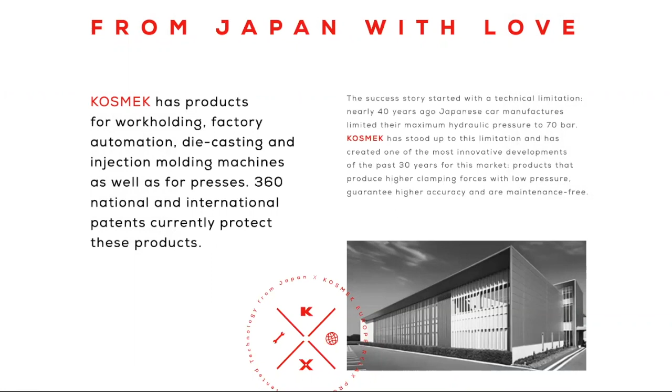KOSMEK is the world's leading expert in powered clamping. Due to the limitation from Japanese car manufacturers to 70 bar maximum pressure 40 years ago, KOSMEK developed one of the most innovative technologies for pneumatic and hydraulic work holding solutions like clamping, positioning, and supporting, and also for the factory automation range. Since then, KOSMEK has been the continuous market leader in Asia. 8 years ago, the increasing demand for KOSMEK's patented low-pressure technology brought the company to Europe.

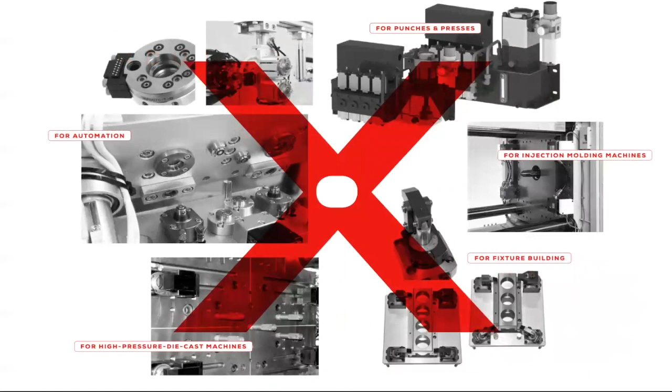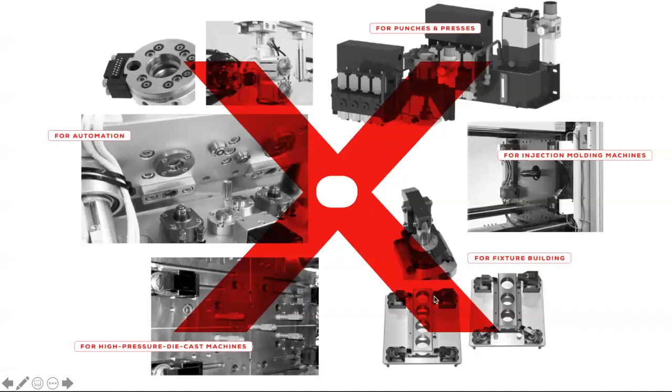KOSMEK is the only company in the world covering all areas of a workpiece production process. We offer solutions for casting, injection molding, and punches and presses. For example, quick mold change systems, ejector rods for changing ejector patterns, positioning of the mold, and pre-rollers for easier loading and unloading of the die. In terms of work holding machining, we have various hydraulic and pneumatic clamps, work supports, and other positioning solutions. In terms of factory automation, we have tool changers, pallet changers, and even grippers.

Have you ever thought about your machining center being able to autonomously machine without any operator present? What would that mean when a robot automatically changes workpieces on your machine depending on what you are making? Or when a robot is able to flexibly insert raw parts into the machine and unload the manufactured parts? Or when a robot handles different devices, workpieces, and low lot sizes while your employees are not in the company or not available?

I would like to bring these answers to these questions in this webinar, because KOSMEK is able to bring these processes onto the robot itself. KOSMEK is able, because of the zero backlash technology, to guarantee a repeatability of 3 microns, as well as reduce the hydraulic usage for the upcoming process steps. Let me show you in the following slides how you are able to achieve this at your machining centers as well.

Here you can see an automated pallet changing system from our distributor Hofmeister. Hofmeister is specialized in CNC design and production of special tools, fixture building, design of production lines, and also has a high-end CNC machining floor, including 5-axis machine tools. For many customers, they machine various parts in different lot sizes on a regular and irregular basis. In order to automate these production orders, they decided to invest in a 5-axis machine tool from Okuma.

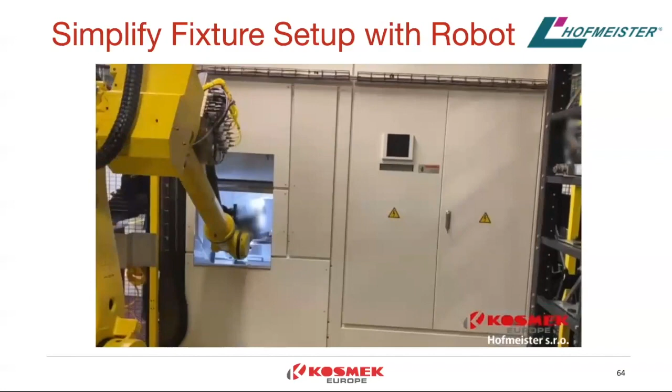Equipped with a KOSMEK 0-point system and the Fanuc robot for 120 kilos, and also equipped with a KOSMEK SWR tool changer and WVA pallet gripper. With the KOSMEK WVA pallet gripper, the robot can automatically load and unload pallets up to a weight of 100 kilograms to the machine table, and place or remove it from storage.

On the table, the pallet will be fixed and positioned with the KOSMEK VS 0-point clamp system. With the patented dynamic positioning technology and high clamping forces of up to 40 kilonewtons, the 0-point system guarantees a repeatability of 3 microns even after millions of loads.

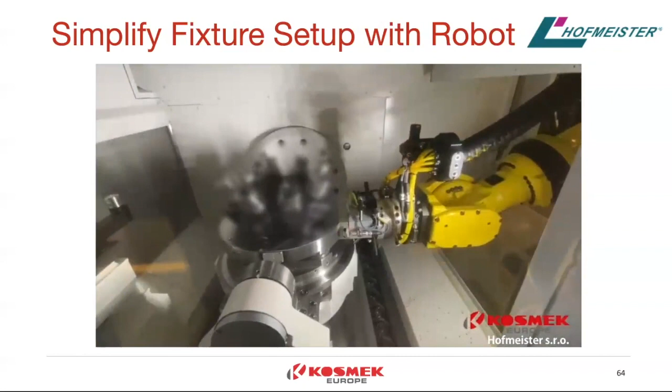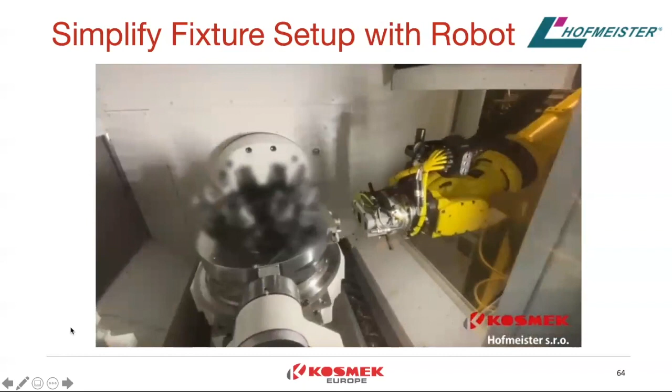Depending on the size and weight of the tool, it can be changed to a different size of pallet gripper or each other tool of the robot. This can be done through the KOSMEK SWR tool changer. This robotic hand changer is the only hand changer which is completely backlash-free in the whole world. It is even stronger, but at the same time smaller than other products on the market.

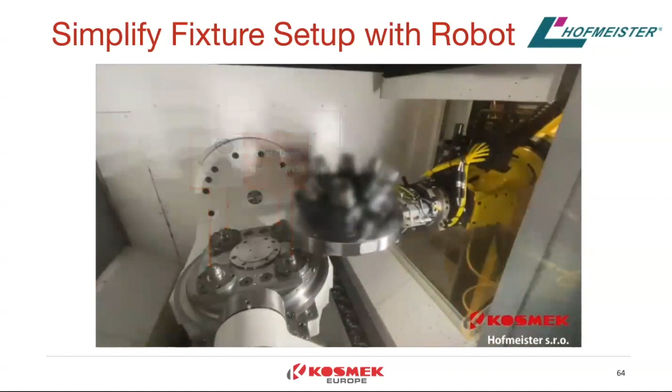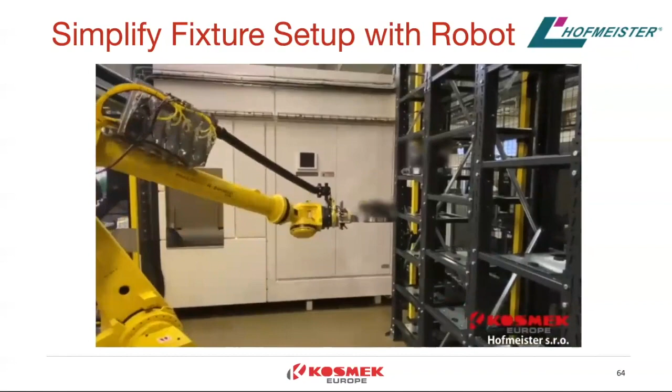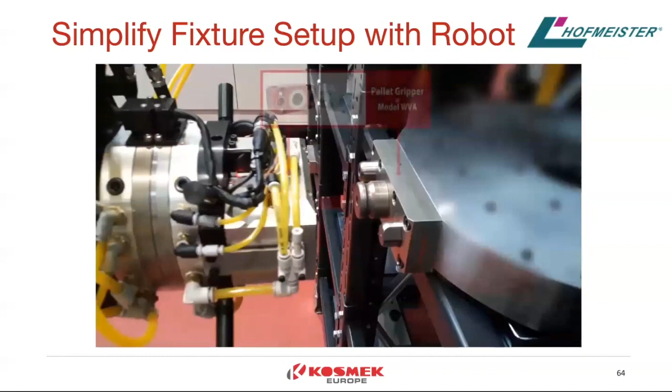All of these unique technologies combined into a highly effective automated manufacturing cell allow the company Hofmeister to automate the production of many different smaller lot sizes, drastically reduce setup times, increase overall product quality and precision, and let production continue autonomously during the night or weekend times.

Now let us get some information about the used products for this setup in the next slide.

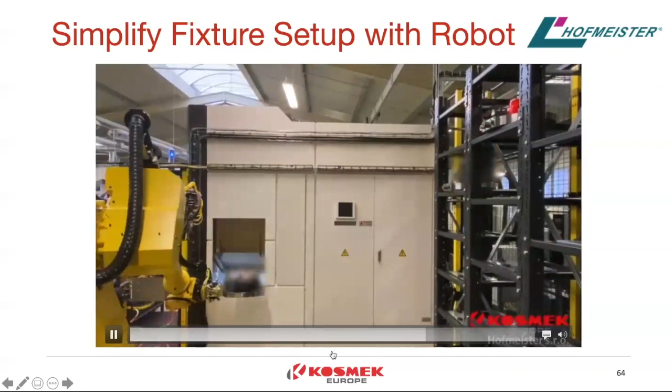Have a look at the WVA pallet gripper in detail. The KOSMEK WVA pallet gripper is designed especially for gripping, transferring, and placing heavy fixture pallets in a machining center by a robot. In this case, the pallet has a weight of about 100 kilograms.

With our pallet gripper, we can reach holding forces of up to 33 kilonewtons or 3.5 tons. It has a safety lock function so that even at 0 bar you have a holding force of another 1.9 kilonewtons. The pallet gripper can take over up to 1,322 Newton meters in bending moments and up to 1,800 Newton meters in twisting moments. The WVA pallet gripper furthermore has an integrated seating detection as well as the possibility of an action confirmation by adding a sensor.

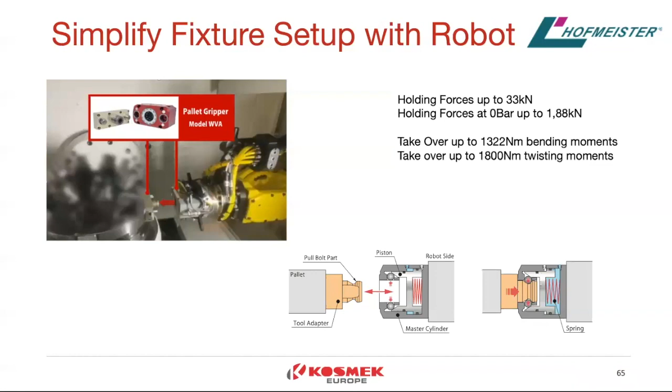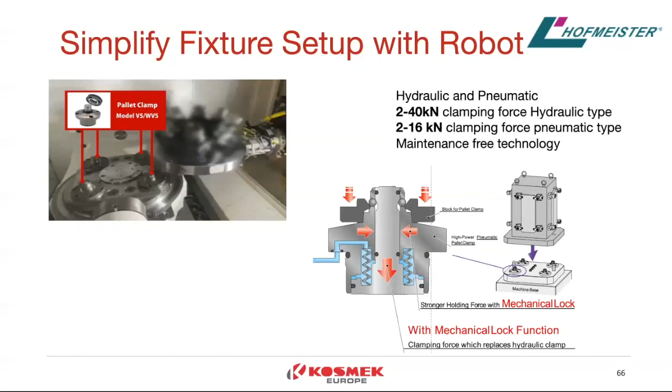Once the pallet is brought to the machining table with the WVA pallet gripper, we need to clamp and position the pallet on the machine table. To do this with a repeatability of 3 micron and at the same time a clamping force of up to 40 kilonewtons, which depends on the model, you can use the KOSMEK 0-point pallet clamp system, VS for hydraulic or WVS for pneumatic. The clamping forces vary from 2 kilonewtons up to 40 kilonewtons in the hydraulic type and from 2 to 16 kilonewtons for the pneumatic type. Also here we have a holding force at 0 bar, which goes from 0.8 kilonewtons up to 2.2 kilonewtons. The 0-point systems are totally maintenance-free and guarantee repeatability for more than 1 million loads in total.

Now the pallet is transferred to the machining center with the pallet gripper WVA and highly precisely positioned and clamped to the machine table. Now your robot can start to load the raw workpieces to the fixture for machining. To do that, you now need to change the tool.

This you can easily do with the KOSMEK SWR robotic hand changer. This unique robotic hand changer is the only hand changer in the world with 0 backlash. It takes over higher bending and twisting moments than any other product on the market. It is smaller and stronger than standard tool changers. Its repeatability is also at 3 micron and it has a range of payload from 0.5 kilograms up to 360 kilograms at 10 bar pneumatic pressure.

For automated production, it offers seating detection for a proper connection, holding force at 0 bar as a safety function, airflow for keeping the robotic hand changer clean, and various modules for electrical and pneumatic connections to the robot. For more details, please see our webinar about KOSMEK SWR and SXR tool changers, which will be uploaded in the following week.

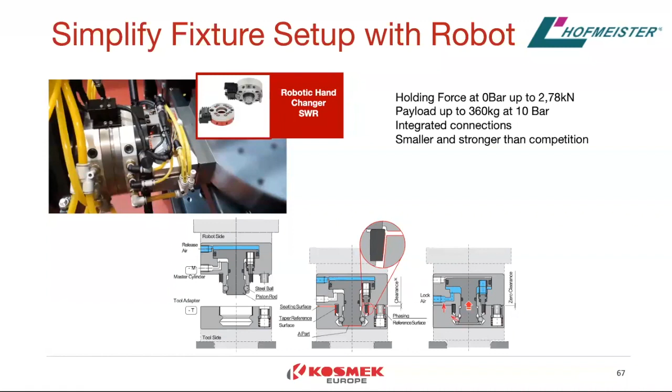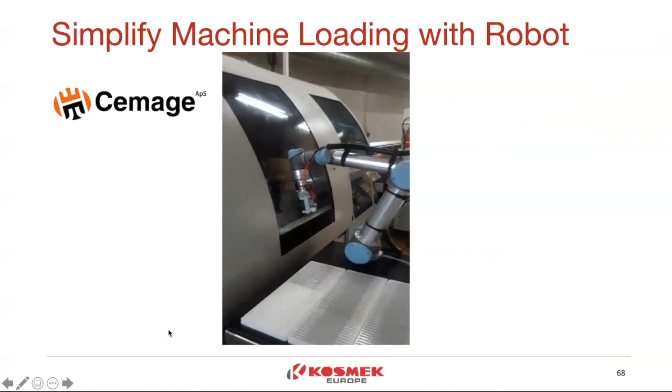Now, coming to the company Jägerspris Finmechanics in Denmark. Their task was to minimize setup times and make production much more effective by using robots in the production line.

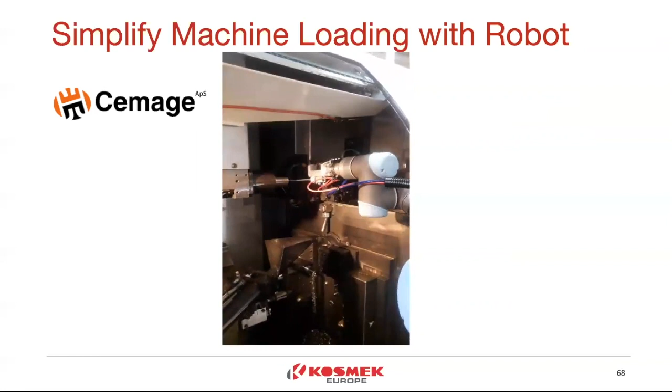The company introduced their mobile robotic unit Cemage for automated loading and unloading of workpieces in a lab. The Cemage mobile robotic unit not only can load and unload workpieces in one lab, but due to a special interface between the lab and the mobile unit, it can be moved from one lab to another, increasing the flexibility of this robot unit.

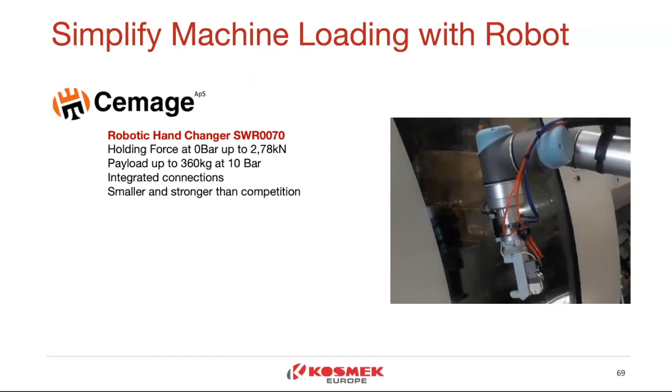The mobile unit is equipped with components as follows. The mobile unit is equipped with the KOSMEK component Robotic Hand Changer SWR. It is for an easy, fast, and secure change of the grippers and tools for the robot, depending on which workpiece shall be handled. Then on a tool changer there can be mounted various grippers and other tools.

In this setup, the customer uses the unique parallel gripper WPS-C with high power technology and holding force at 0 bar. The WPS-C can achieve up to 131 newtons in clamping force and up to 400 newtons in holding force at just 5 bar. Holding forces at 0 bar as a safety function range from 26 newtons for the smallest up to 53 newtons for the biggest model. The repeatability of 0.01 millimeters is also given for transporting the workpiece out of the machine.

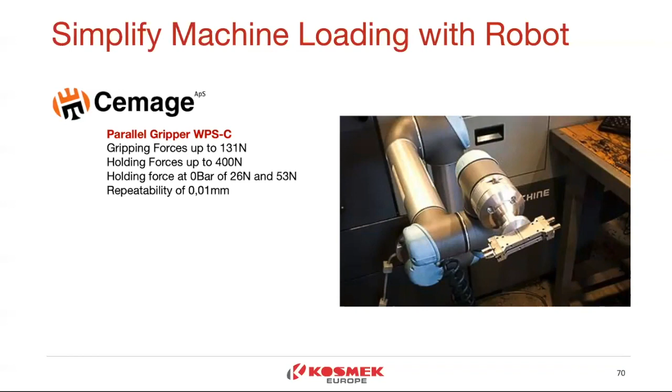The specialty of connecting the Cemage mobile robot unit to the lab housing is the KOSMEK ball lock cylinder WKA. With this very small but effective pneumatic ball lock cylinder, you can easily fix and position the mobile robot unit to the machining center housing. When moving to another machining center, you unconnect from the first center and connect it to the next.

Now coming to some facts about the ball lock cylinders. It is very small but highly durable due to a simple design. It is locked by spring force to the designated space, and depending on the size of the ball lock cylinder, we have a holding force of up to 200 newtons at a weight which ranges from only 7 to 41 grams.

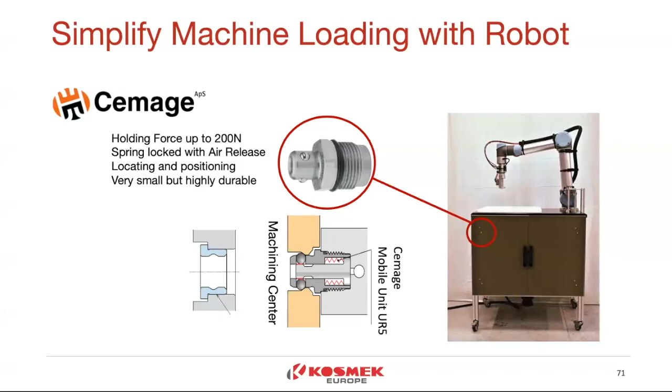Now let us have another look at the Cemage mobile robotic unit from Cemage.